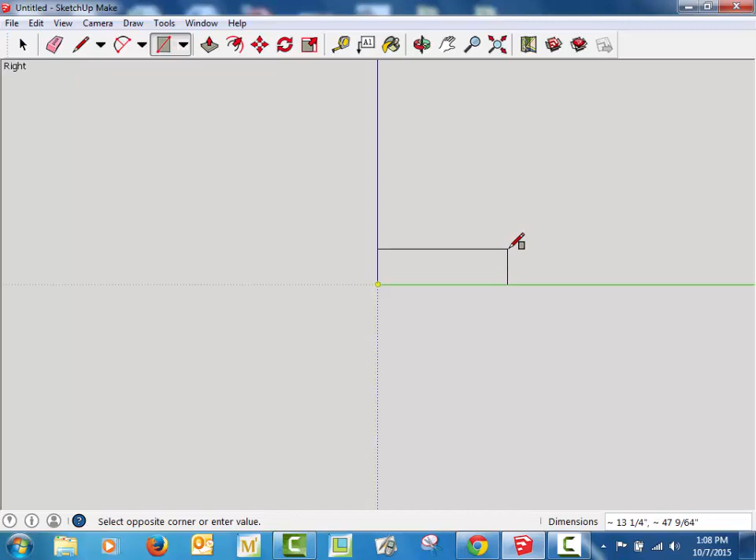Use my rectangle tool, infer the origin, and we're going to go with an 8 by 22 rectangle. Alright, zoom extents, get it to be just about the right size.

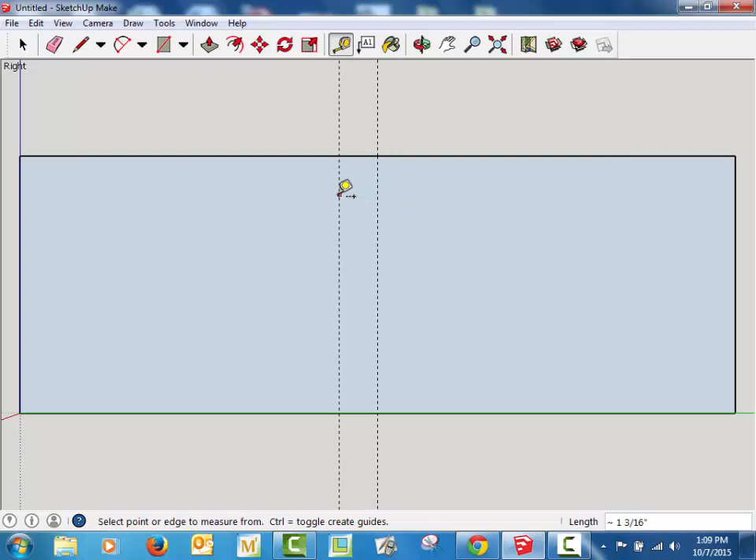Now we're going to do heavy use of the measuring tool to get some guidelines going. So I'm going to start from the edge, get to the midpoint, and then from the midpoint I'm going to work out in both directions. So my first line is going to be 8, and I'll set up a guideline at 8 the other side. Then I'll set a guideline at 4, and then 4 on this side.

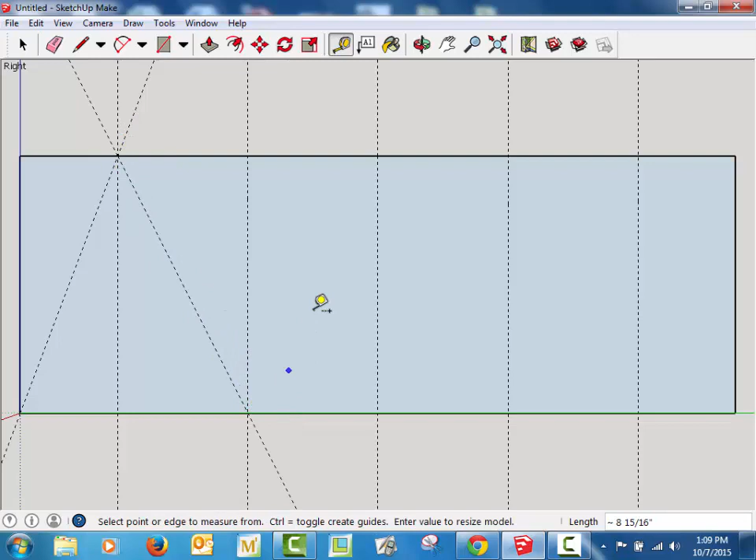Now I can start tracing some guidelines to get the rest of my truss shapes. I'll start at the bottom corner, and I'm just going to go up and down using the intersection inference. Look for the red X. And I've now got the basic shape of my truss.

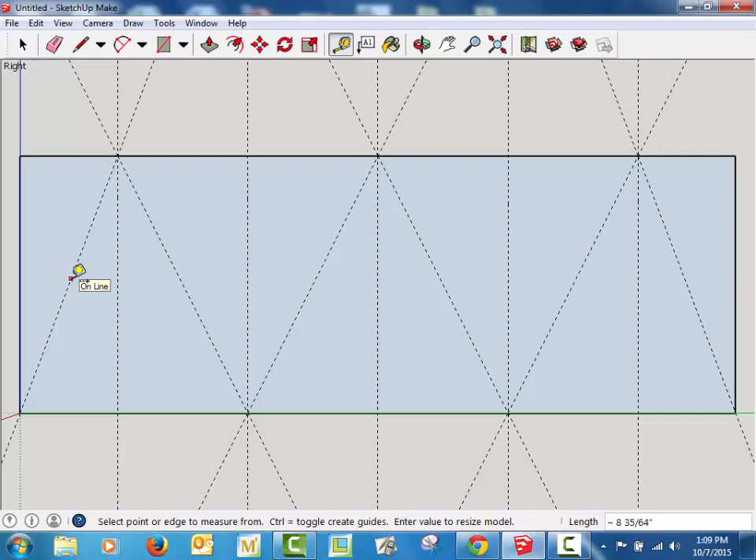These are the center lines for my beams, so I'm going to go ahead and work some offsets. I have 3/8 inch wide material, so we're going to go 3/16 on either side of the center line. After you first enter it, most of the lines will infer 3/16 after that, so you can make very quick work of this.

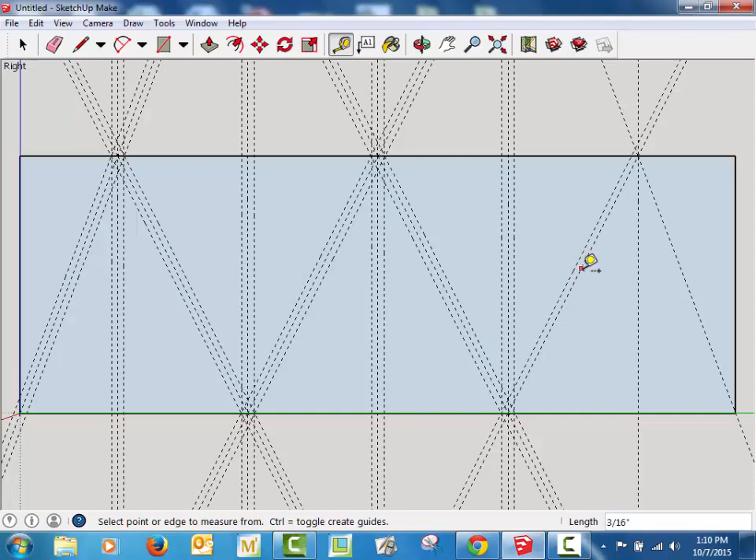Okay, so I've got my outlines for my beams. Now let's go ahead and put in the top and bottom chord. So the material is 3/8, so I'm going to have to enter that one separately. It might infer the bottom one for me.

And I have the general shape. Now I can trade in for the pencil tool and start tracing. On the very end, I have to make sure that I start at the very top and cut off the intersection there. The rest of it, I'm going to start intersection to intersection. When I complete the third one, I end up with a nice solid shape.

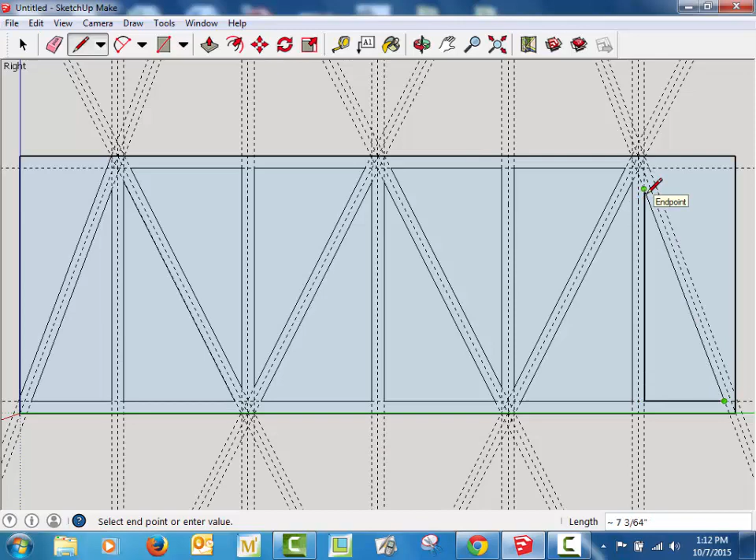Again, try to get to the top and down to there. Now that I've done this, I should be able to select and delete most of them. Let's try this one, it's usually the toughest. Alright, we're good there. And just click to select, hit the delete key.

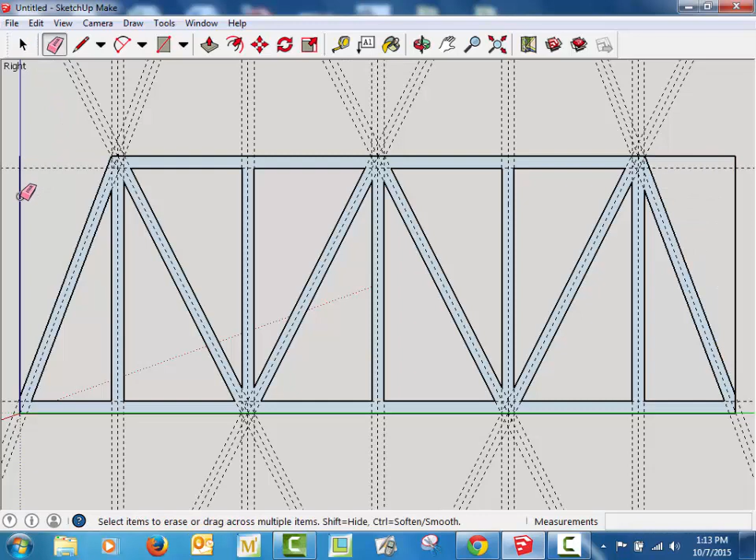Alright, get my eraser to clean some things up. And I have a bridge truss. I go to view, uncheck my guides, and it's nice and clean. There's a bridge truss. You can go ahead and dress it up if you want to more accurately reflect a build, but there's your simple bridge truss.